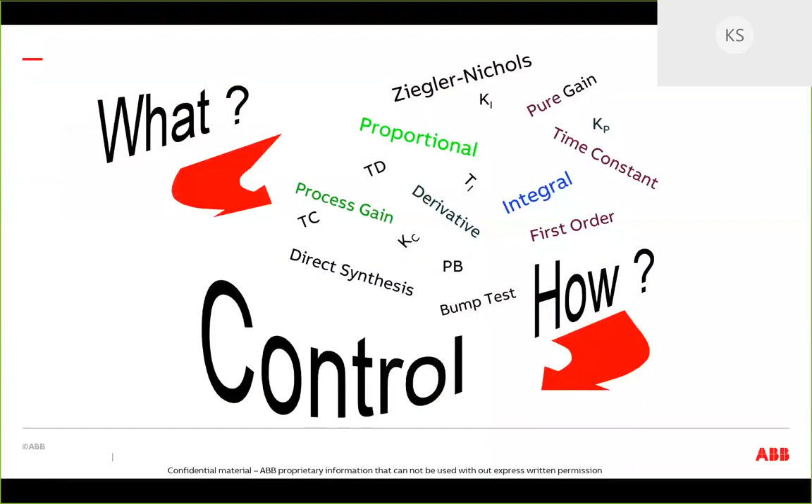Now, the world of process control, and I've been fortunate enough to be in it and have tremendous mentors and training. I can't give you everything in 50 minutes, so what I'm going to try to do is give you the high points, and hopefully it'll spark an interest. I don't want you to leave this thinking that tuning is some magic that only the elite few specialists know. I know it may seem like that, but that's just because we've been doing this for a long time, and we can look at processes and figure things out.

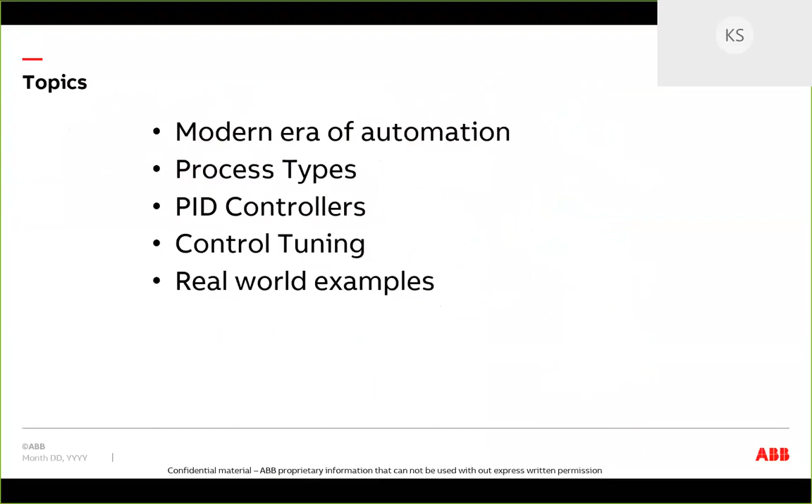That's why I want to show you some elemental truths that I wish I had known that would have accelerated my career, and hopefully that'll help. Then we have a whole bunch of stuff at the end. This is a technical talk, trying to transfer information that ABB is allowing us to do, and all I'm asking is you stay until the end and maybe click a couple buttons on topics you might find interesting. But this is not trying to sell you - I'm trying to show you some fundamental components that allow you to do this kind of cool stuff.

And for whatever reason, this is what I love to do - I love to go into a site and figure out where they're at. We just had a big workshop, and that became one of the biggest issues in the Industrial Revolution we're in: the definition of normal. Where am I, what does good look like, and how do I know when I've left that zone?

There's so much in the information age today that, I mean, that's where I'll have a question here in a minute, but we like to look at that, and since we have the collection - I think I last looked, we've analyzed like 1 million loops a day - we get a baseline based on that, and we can say, oh, you're here. That's what we call a benchmark, and then we can implement corrections to reduce your variability.

And there's value in that, and that's another thing - I want you to start telling us what other technical topics you would like. There's so many, and I have a list at the end, but value: what's the big deal about taking the wiggly line from that big wiggly line to the closer wiggly line, and then what happens if you drop it down or raise it up, depending upon your speed, if you're trying to save materials, do material substitution, speed up, slow down, or whatever.

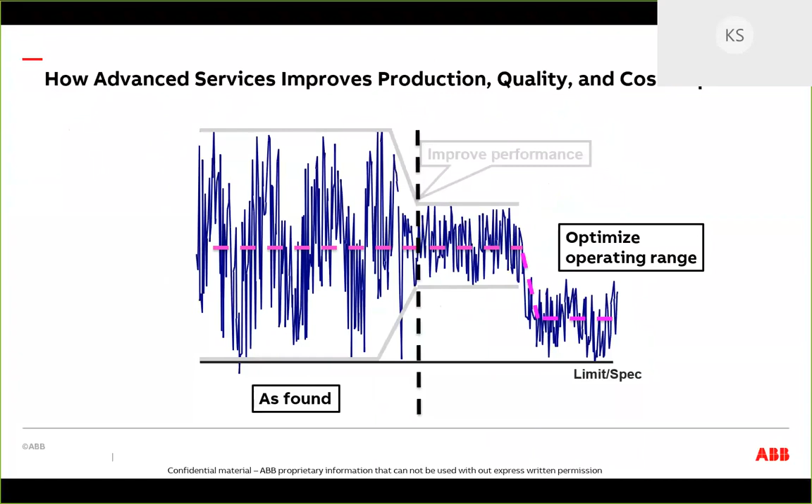So this is the essence of what we do. But what we don't do is make controls that were intended to make things worse. This is a real life picture from a trip to China, where they had an example that said, when we turn your controls on, our control utilization goes up, our production goes down. And they weren't very happy with us. I was like, well, that's not what we designed. Well, that's what happens - and they would show their hand waving like a bell. And I was like, well, that was not what ABB designed.

We don't sit around trying to figure out features that we can sell that don't work or make your process bad. So my point here, one of the truths is: if you have automation equipment that is off, assume it's broken. One of our senior field engineers used to use that as an indicator, saying if it's off, there's something wrong. I've seen this - on a paper mill, if you have a sheet break and you do a wash up and your shifts are all doing stuff to get the machine back, they may have forgotten to put dry stock on.

Then the next shift comes in and thinks, oh, well, that was off, so I'll leave it off. And the third shift comes in and says, oh, well, it's been off for two shifts, I'll probably leave it off. And next thing you know, it never gets turned on again. And so that happens.

And I don't want you to feel bad about that, as in today's world there's so much automation, it's sometimes hard to keep track.

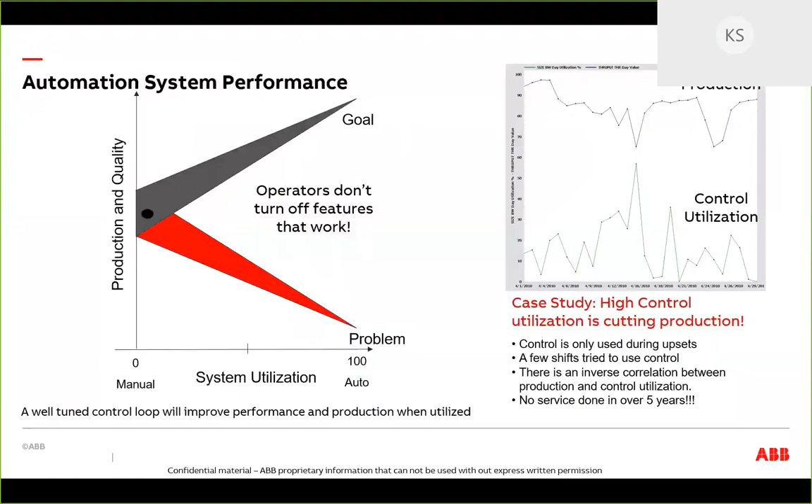Now, what we found, and this is where we're going to have a polling question, Chris will pop up a screen here that you can pick. I'm curious, and I'll show you what our records have found. What would you say is eating your lunch? Or if you were to ask about control loops, do you have problems with your loops being in manual? Are they out of range? Are they increasing variability? Or are they doing a good job? I'm interested, and you can click a button. There's not going to be a test, I'm just interested to see if the research we're doing matches what you guys are seeing.

Chris, what's this? I always forget. This says elapsed time, so when it counts up to a minute, then you can kill it? We've got about 40 seconds left. So this is where it's interactive. I don't want you to think this is just one-sided, but I want you to be participative, and this is a way you can do that. Also, maybe so you don't fall asleep or whatever.

I also want to mention a safety moment while we're going into this. Guys, if you're driving, pull over. There's nothing here that's that important that you can't watch later. I don't know where you're at if you're in a facility, so I can't tell you if an alarm goes off. In my house, there's not one scheduled. But please look at your exits, look where you're at, and make sure you're aware specifically. And then in today's world of this virus, I hope you're all taken care of.

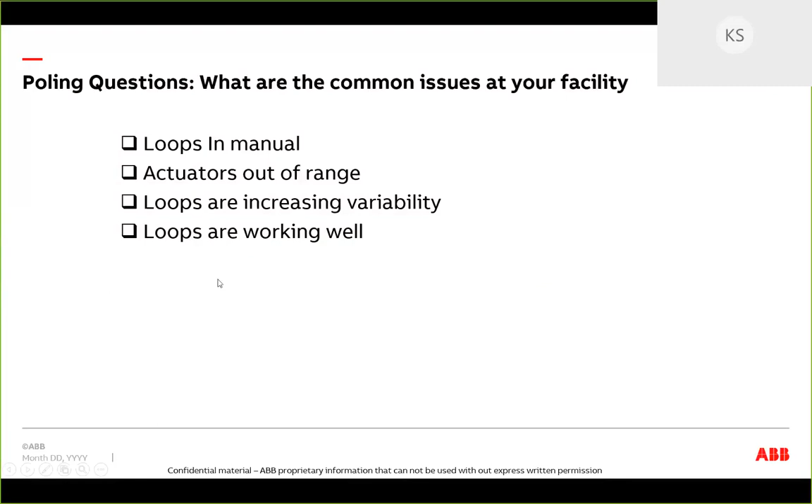Let me show you the next one. Can I close your window there? Okay, and then I'll go to the next slide.

This is what we kind of have seen. You know what the half-life of a control loop is? PID loops are everywhere, there's thousands of them. When I first started, if I could do 10 loops I thought, oh this is wonderful, if I could do that in a week. Now I think the last one our group did, we did 1,500 at one time. And we're finding that about 50% of your loops are going to need recalibrated within 6 months.

And recalibrate could be a bunch of things. If we had a setting I'd have you think about what can cause a loop to go bad, it's not just tuning. When people say it's just a tuning issue, I kind of want to say you don't really know this stuff. It could be an actuator, it could be a valve, it could be air, it could be dirty air, it could be the valve position, it could be the raw materials, it could be the temperature outside. And then sure, it could be the tuning, but it could be the operator range that thing runs in. It could have to do with machines running parallel at one time, and individual, so you move in and out.

And what we're seeing more and more is this tendency for loops being in manual, which is what you're seeing. So keep that in mind: we didn't design all this stuff to have it turned off, so why is it off? We need to talk about that.

I'm actually seeing more loops being out of range. When we first did this, it was around 15, now it's closer to 20 to 25, which is because most of us have been trying to drive production, and that means getting your actuator constraints out, so they get into the nonlinear range. And as your actuators get out of the control range, your variability goes up, which means your quality goes down.

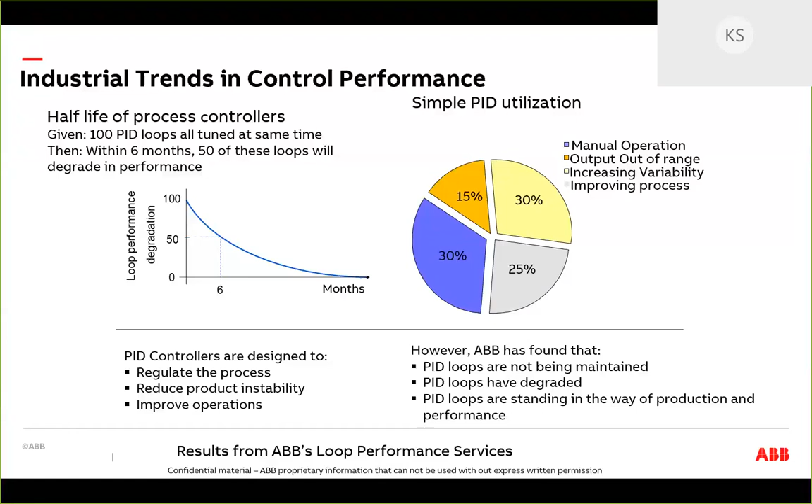Now, I'll finish this on that kind of a talk. We're all about actual production quality or cost to produce. And I'll try not to give all my war stories or we'll never get done, but I've seen this stuff manifest itself in this chain of process, actuators, transmitters, filters.

I saw a guy plug in a filter and it made a head box go unstable, or a tank level. They put a filter to smooth it out, but the filter changed the dynamics and drove it into instability, and I get called in the middle of the night. I've seen all of these, and our team has seen all of these. So it does take a little bit of understanding to know the swim lanes.

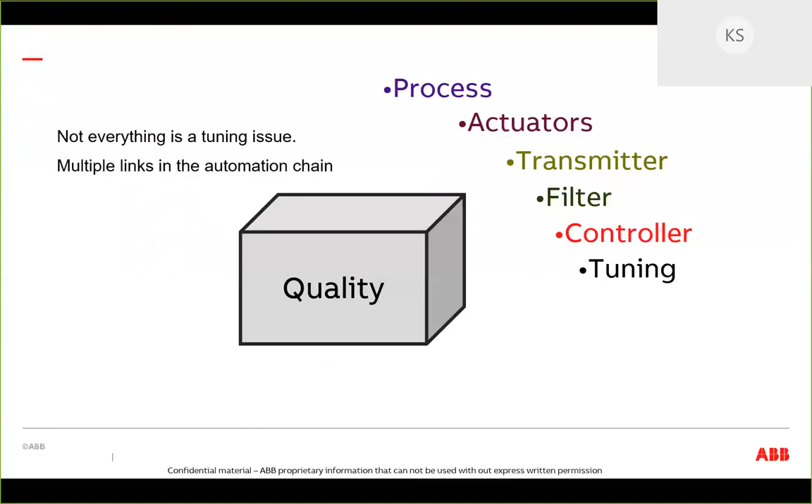This little bit of discussion for the next 40 minutes is to kind of go through those. Okay, process identification. That's the starting point, to me. There's other starting points, but I need to know the dynamics.

If I hop in a car, I kind of want to know if I step on the accelerator, is it going to take off? Am I driving a semi-truck, or am I driving a Porsche, or a Volkswagen? You kind of need to know so you can adapt. All of our processes have dynamics, and I like to call those dynamics unknowns or question marks.

There are different methods for identifying those question marks. There's Newton's laws of physics, called first principles. I don't know if you've ever done that kind of stuff - that's not very fun, but you can do it. I do like the one where you use a mass balance or an energy balance. Actually, if you watch the tank video, you can actually tune a tank based upon the volumetric calculations without doing a bump test.

It's pretty cool, that's kind of an example, but sometimes the best way is to inject energy of some sort into this. There's a whole other side - it could be a pseudo-random binary sequence, it could be a sine wave, a step wave, a square wave, an impulse. Kevin likes to bump it. And when I say bump or a test, I'm just talking about a step change.

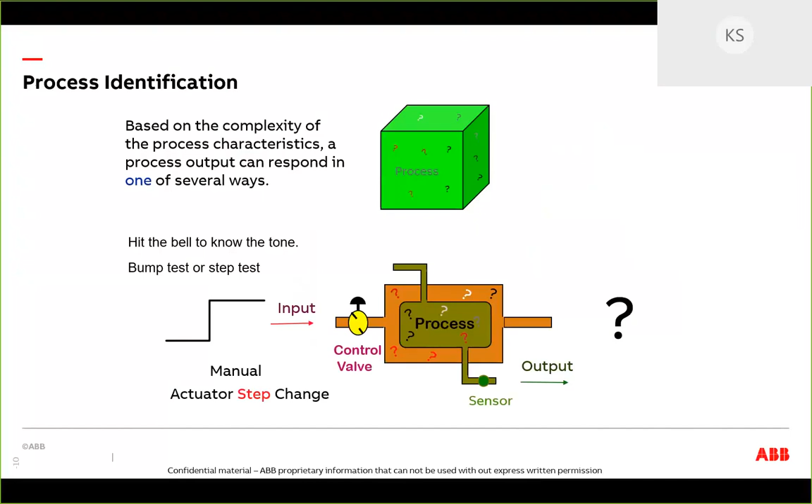There are things you need to be aware of - you just don't go and bump everything. You want to make sure you bump in the right direction, I'll give you a hint about that. And that can be open or closed loop. But the point is every process, they're so common that there's at least six classifications - there's way more than that, but 6 classifications I want to bring your attention to that you will likely see.

The pure gain process really doesn't exist. I guess a light switch would be close to that - it's off, then it's on. If you slow the sampling rate down enough, you can cause any process to go into that.

Now, a first order process is a time constant, a lag, which is like your flows, your pressures. That's the one we're going to focus on today. And I will talk about some of the higher order overdamped and underdamped solutions. Then integrating processes are like tanks. And then process with dead time, that's another one.

All right, Chris, you may have to let me know if I'm still talking periodically.

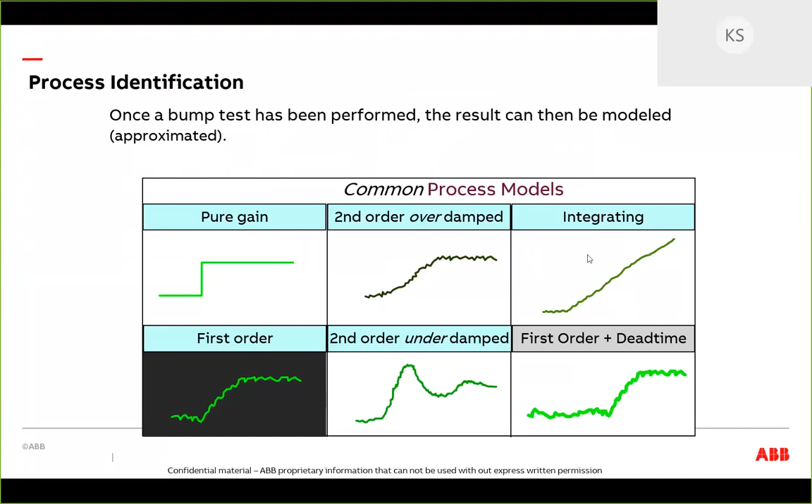There's a network issue flopping around on my side, so I hope I'm still talking. Yeah, we can hear you fine. Okay, well, I got this thing that says your proxy server needs it. I'm like, well, let's keep going, and hopefully I can get through this.

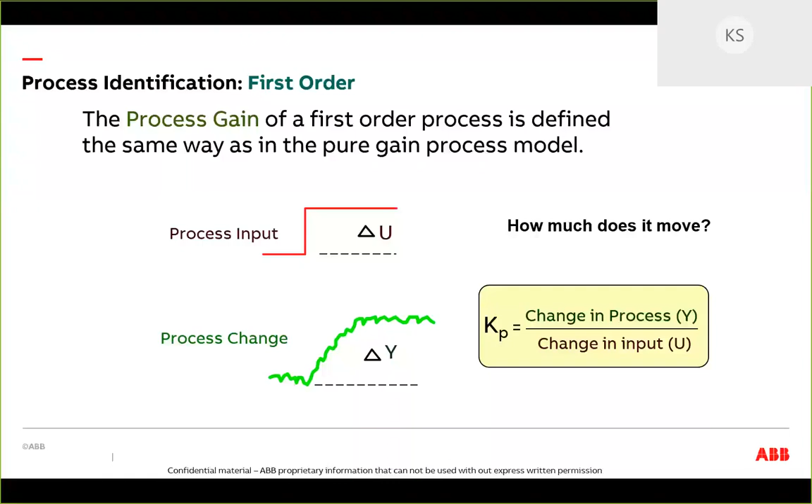Okay, so identification, there's a couple of ways to do it. There's closed loop, where you change the set point, and open loop, where you change the actuator. What you're trying to do is figure out how much mass does this input inject into the process. It's sort of like a garden hose versus a fire hydrant—how much oomph does a quarter turn give me? You've got to know that, because if you don't, your controller is going to have a bad day. So that's a way to calculate the change in measured value, that delta, divided by the change in the actuator that caused it. That's a great way to identify the magnitude or strength of your actuation effort.

The other one is how long does it take for that response to settle out—how long does it take to go from when I made the change until it settles out? Now, the purists on the phone will realize that it's an exponential, so it's 4, 5, or 6 time constants. I have found that I divide by 4 better than I divide by 5, and when there's noise, my eye can't really tell the difference between 4 and 5 time constants. And if I'm going to build stability into my calculations, dividing by 4 gives me a bigger number, and that's why I pick 4.

There are other methods, there's a 2/3 method you can do, and I have those in those videos. But you have to know where this thing's going to settle out. This is where knowing the type of dynamics matters—if it's a tank, it'll keep going and going and going, and you need to be careful, because you put an imbalance into the dynamics and it keeps integrating that. So I don't just do a bump test and walk away. I look and watch and make sure that this thing settles out, and if it takes off fast and comes back, I know I've got issues.

When possible, I like to go and evaluate the process by hand—look at the actuator, look at the valve, make sure the instrumentation is right. In today's environment, that may not be so easy to do, but by looking, if you bump the actuator and it doesn't move, don't tune it—go fix it. It's like if you're driving your car and you turn the steering wheel and the car doesn't turn, you don't speed up. So if you can't come up with a correlation between the actuation input and the process measurement, you need to go back and figure it out.

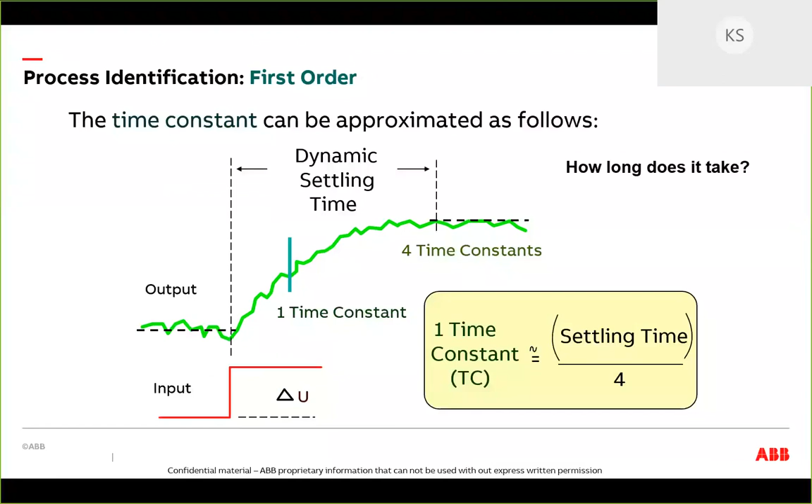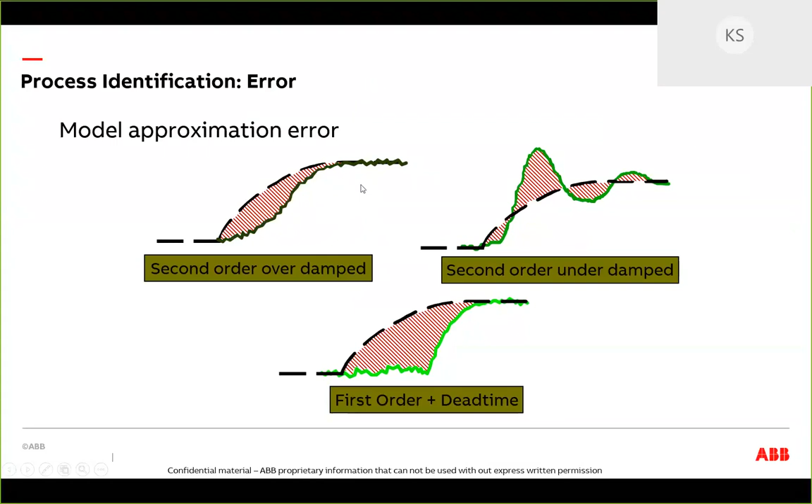So those are the hints that I'm going to give you. In all of these, I know how much it moved this way, how much it moved, and how long it took to get there. Now, another little hint—when you first start doing bump tests, it's a little daunting.

I've seen folks, myself included, keep bumping in the same direction. Next thing you know, you're making an off-spec product. I like to try not to bump too far away from where they're running their production process.

Unless you're looking for hysteresis or backlash in the valve, if the operator says you can do a 2% bump, this allows you to go up 2, down 4, and back 2. And that middle one gives you the best signal to noise ratio.

This is kind of an art, and a lot of times I'll look at the trends and see what normal actuator changes are. I like to put the loop in manual, see if it settles out. I like to do manual changes that are small until I can start seeing and predicting the results.

I very rarely will do one bump. I like to do 3 to 5 until I start to be able to predict. That's kind of how I do this. That's when you're doing them one at a time, and that's what we teach.

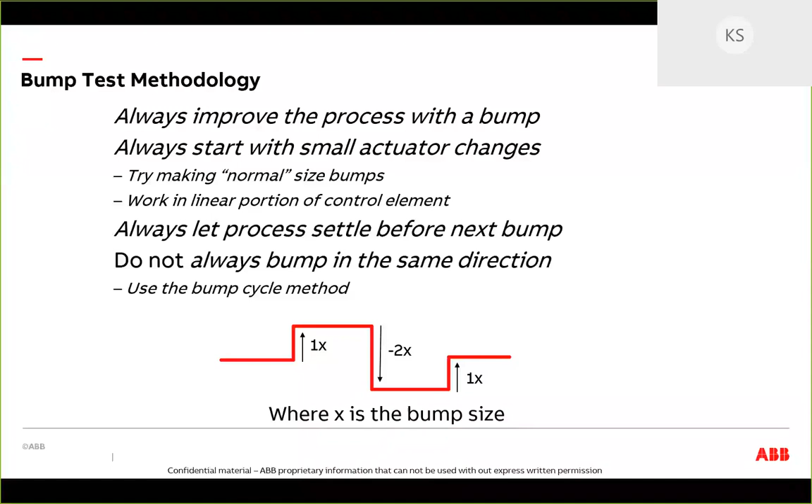In today's world where you have a thousand of these loops, you need to pre-qualify which ones you go after, and I'll share that at the end. Now, I talked about that.

Do you have to be an expert in Laplace transforms? No. You need to know that the process gain and the time constant make up a majority of the self-regulating loops - how much did it move and how long did it take to get there. Once I know that, I can move on.

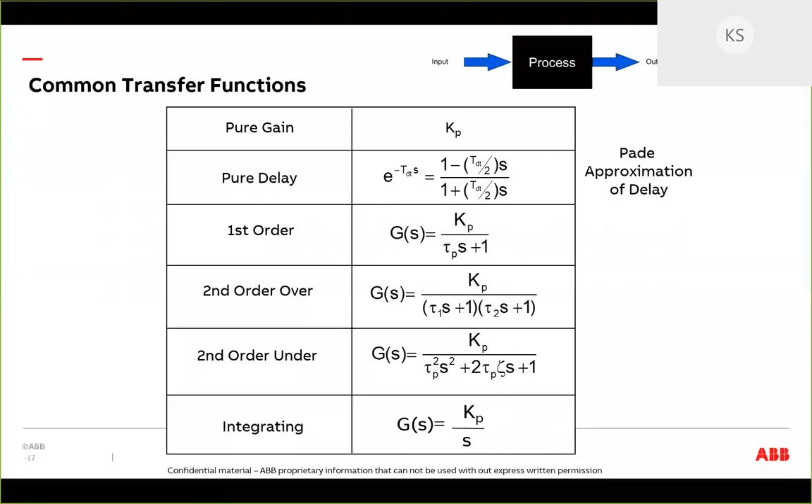So I just showed you there's some mathematical background here, and you can keep going into this. This is what, when I got my undergraduate degree, I liked so much that I went back to Ohio State and got my master's in this stuff. So be careful what you're listening to - it could affect you for the next 25 years.

This is where, if you ever have an interview with me, I'll draw this out and it really freaks people out. They'll say, oh, they changed the machine speed. I was like, no, it's just dots on a screen. What do you see? Is the measured value changed? Okay, there's a change. Well, it's staying off the set point.

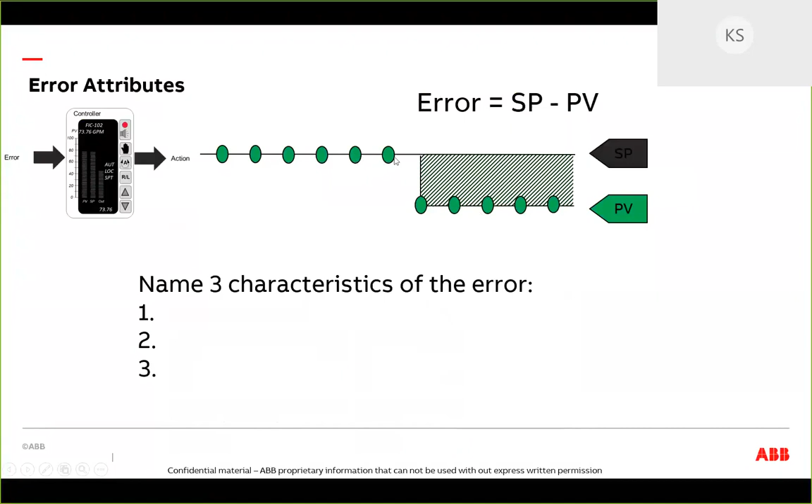Okay, there's a duration. And then the last one's kind of hard. If you look at the difference between these two dots and these two dots, that difference is the same. Where is it that the difference jumps out? It's this one, between here and here. So when you put it together, you have the rate of change, the duration, and the magnitude.

The reason I'm showing you this is this was the epiphany, the aha moment. It's like, oh, that's what a PID control does. And that's what allowed me to start looking at the outputs of controllers and identifying the tuning. It helps you immensely.

This did for me, whether you just take it or not - there's 3 attributes. The present error is called the magnitude of the error. The duration of the error deals with the past, sort of like a watchdog, and the rate of change is looking at the future error.

And if you look at the mathematical equations that go with that, proportional is a change that is proportional to the error. The integral is integral to the duration of the error, and the derivative is this pulse that changes. For some reason, this picture was the aha moment for me. I was like, oh, this explains standard, parallel, classical.

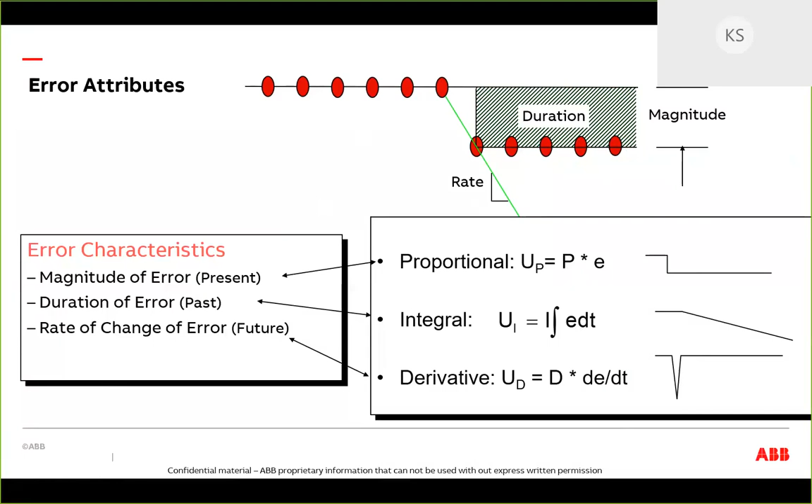I always thought that P kind of did its thing, and I just didn't understand it, but this picture helped me realize how this stuff was built. If you ever get a chance, do research on the original full scope pneumatic chart recorders that had bellows and nozzles and baffles - they're works of art, and they were designed this way. That's what I thought was fascinating. So I'll go on now.

It's kind of important to start to think about the interactions between the components P, I, and D.

The first aha moment was the three attributes of error. The next aha moment was, what's a repeat time? I used to get that. What's a reset time? What are you resetting anyways? Because that's the integral time, and it could be in repeats. So how is time a repeat? And then proportional could be a proportional band, it could be controller gain, there's a bunch of different terms. And if you have the Infinity, it could be S6, S7, S8, or S5, 6, and 7, whichever, or S11, or other S numbers or letters.

I had one guy get so shook up: why don't we have standards on tuning parameters? I'm like, because there's different companies, and we all design different stuff. But you have to step back and realize the theory of operation is the same.

That's what I've done here: the repeat time, the way I like to think in a standard controller, is the amount of time it takes for the proportional kick to be repeated by the integral action. So you can see your original error as a step change, your P kick happens, then you integrate that, and the reset time is how long it takes to reset that original proportional kick. That was another aha moment, maybe you had more, but that was an aha moment for me.

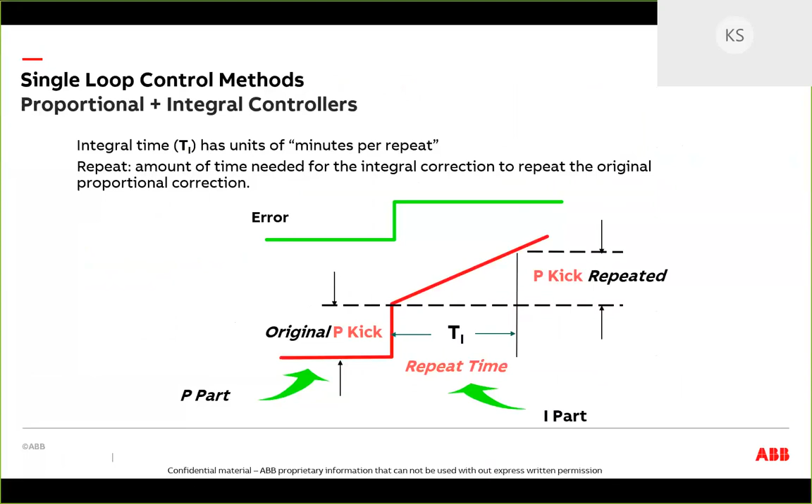When we do the training class, we actually do labs where you can experience this. You can set it up, and I've done this, like if I go up to a controller and I'm asked to tune it and I don't know what it is, I'll ask them to bench test it, or I'll set up a Gen Con or something like that, make a little controller, induce these changes, and watch. I'll adjust the PI and watch the output, and then I can tell the algorithm type, and then I know how to tune it. So you can bench test stuff, and it's easier now that you can do it in software.

On the left-hand side, I'm showing constant proportional with different integrals, that kind of makes sense. I've got it set up so you can see how long it takes to repeat that proportional kick - it's less. Over here, I have constant integral with different proportional. See how the slope changes? This is called the standard algorithm. The parallel controller doesn't do this, and I'll explain that in just a minute. That's one of those other light bulbs that went off.

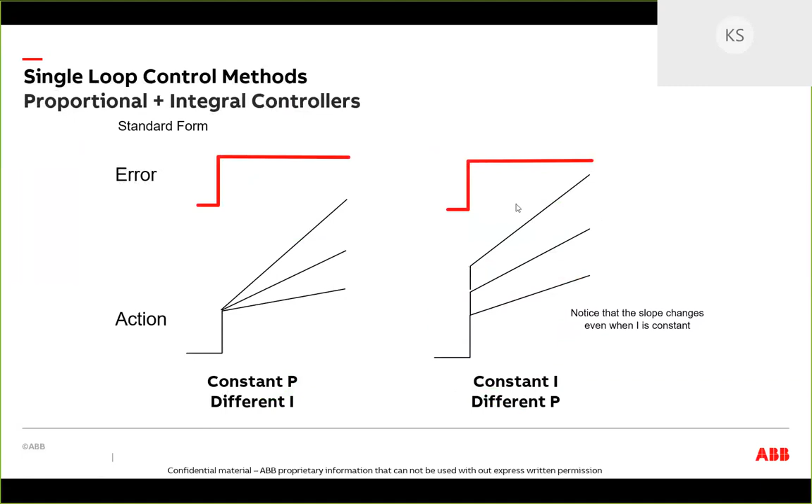Derivative is really another interesting one. It's looking at the slope of your error, and the derivative time is a forecast into the future. You're saying, okay, based on this slope, I expect my error to be this in the future. Well, if I know my error is that in the future, I better start correcting for that error now. And that's the whole thing.

But this also illustrates the problem with derivative. If you go back to the history of derivative, it was designed in the pneumatic era - go back and look at the full scope, the early chart recorders that are beautiful works of art. Pneumatic, air, sluggish stuff, and there wasn't noise. It just was slow, so you could kind of goose the output with derivative, and that's what it was for. Today, you have so much noise.

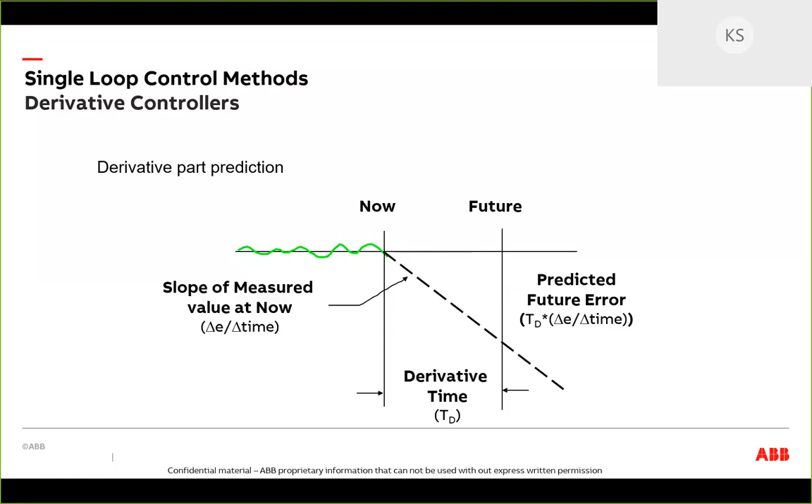This is one area that I've seen cause a lot of consternation in the industry: the forms of the PID algorithm. This is where I wish I could talk with you in person to see if you've even seen this. It used to be very clear by vendor. If you had an ABB Master, it was standard. If you had a Bailey Infinity, it was parallel. If you had a Mod 300, it was classical.

But then what happened is when people started mixing and matching control systems, they would toggle between modes in the setup of the controller. I was at a site that had a list of controllers where the default was parallel, but somebody didn't realize that one of these parameters toggled the algorithm between parallel and standard. So half the controllers defaulted to standard, half were parallel. That poor team was like, this tuning stuff is nuts - if I put this number in on these, it works, the same number on this, it explodes. So they were very disenchanted with process control, and I was like, oh, you guys.

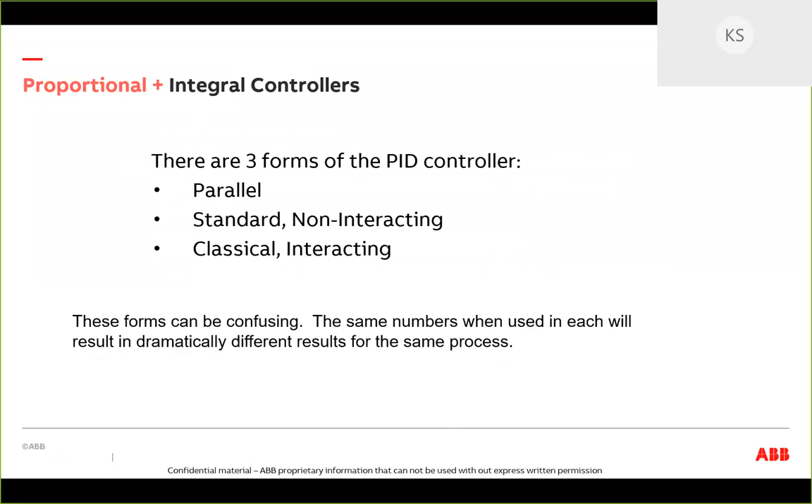So what I want to do here is just show you that. In the book, chapter 6 has a bunch of these. A lot of times if you go to the manufacturer and look, you can see one of these pictures.

So you'll see something that looks like this. Parallel controllers are literally parallel - here's your error, and the error has parallel paths to an output. This is kind of the original, how folks made them. You'll see either a block diagram like this or an equation, and what I look for is the parentheses. If there's no parentheses around this, you can guess it's parallel. That has a big deal to do with tuning. In this case, the proportional gain is just on the error, the integral gain is just on the integral, and the derivative is just here.

Now on Infi 90, they'll put a parenthesis around the whole thing, and then they have a scaling factor. The scaling factor is used to normalize or convert the measurement into percent. That's the other thing - when I dump tuning parameters, I'll look at that. I'll take the span, take 100 divided by the span, and that's what that calibration factor is supposed to be. 60-70% of the time, it's not, and people will use that and detune their controller.

That's another red flag - so there's two for you. You can go look at your derivative, dump all your tuning parameters, look at derivative, and then look at your scaling factors. If they're off, that goes to the head of the class as loops to play with. This is parallel.

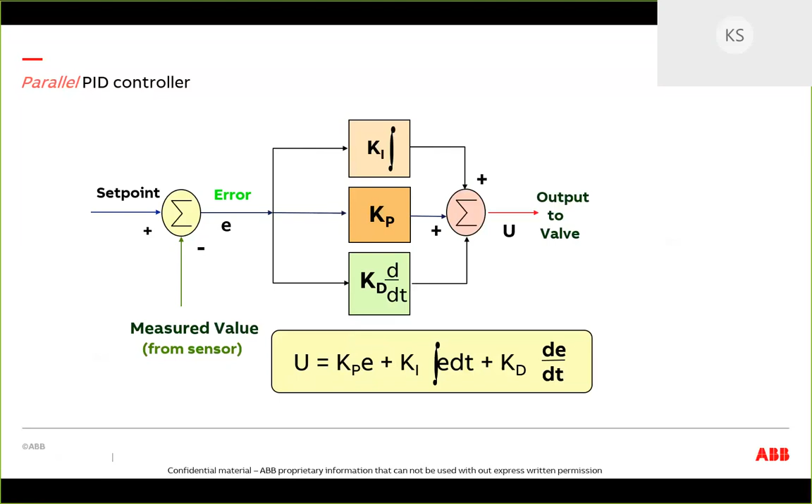The reason we tend to like this is you set the integral based upon the dynamics of the process, and then you adjust the speed of response by adjusting the control gain. Derivative is used for something else, but for the most part, if derivative is 0, you just have this top part. You can see the difference - in parallel, they're parallel paths. So you can make a parallel and standard act the same, but you have to change two numbers.

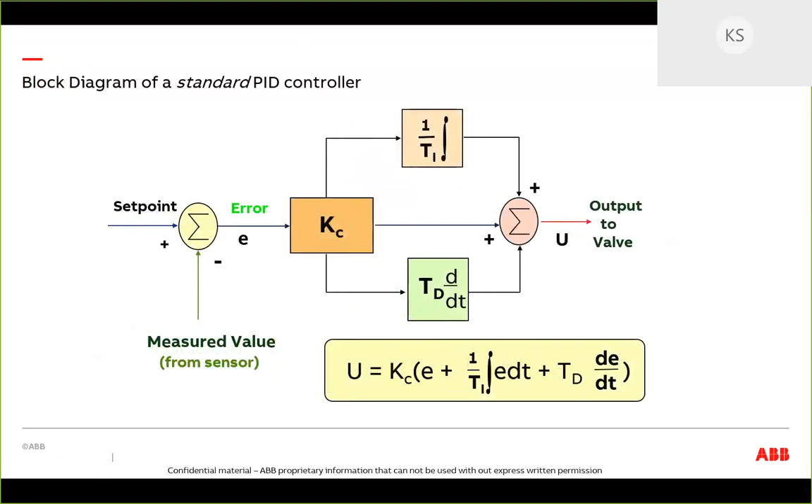I don't know if this is making sense to everybody, but please check - it's not enough to just look at the manufacturer. There's usually a function setting within the PID block that allows you to pick which form of the PID you want to use. And as wonderful as that is, it can be very confusing if you don't change or check that.

But if derivative is 0, this term goes away, and you are left with the same as a standard. So if derivative is not used, standard and classical are the same, and so you may only have two different loops.

But this has been a challenge in the industry, especially now that there's a hodgepodge of control systems out there, and a lot of this stuff's been installed for 30, 40 years. There's single loop controllers where you may have lost the documentation. There's DCS controllers that may have features where the default is standard, but they may have flipped it to parallel, and it can come across as extremely confusing to folks. So hopefully you can use this to clear it up a little bit.

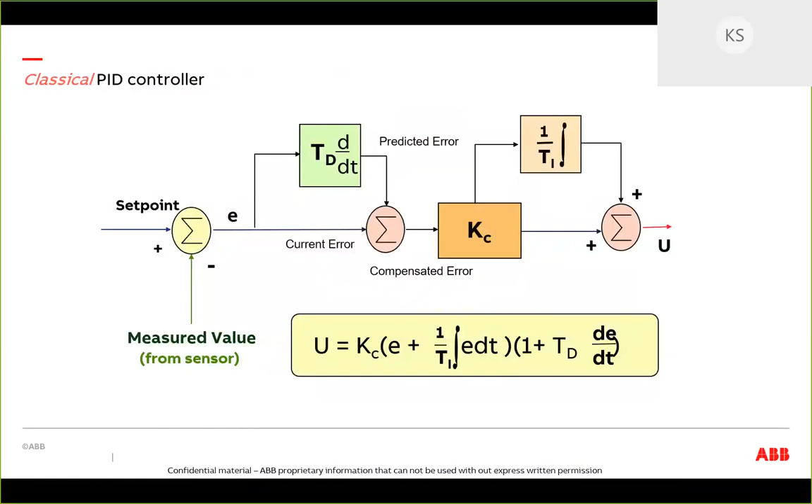That's what I'm trying to show here - the big difference between standard and parallel. On standard, once you set your integral, it self-changes based upon what your proportional is - it's just the slope. On parallel, the slope doesn't change. So what happens, and that's what gets folks confused, is you have an effective integral time that gets slower as you increase your proportional gain, which is counterintuitive. It's like you increase your proportional and the reaction to get to set point is slower. Well, that's because of the way the algorithms are written.

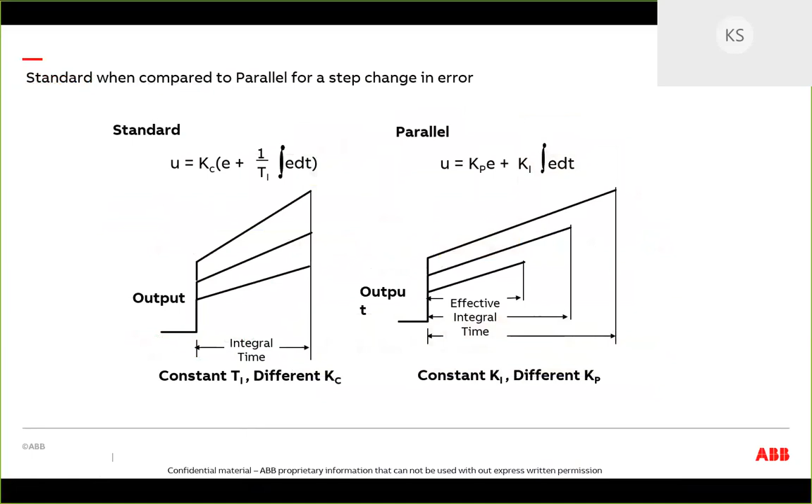So, man, I'm going to have to speed up. I'm kind of passionate about that. I've seen that hurt so many folks.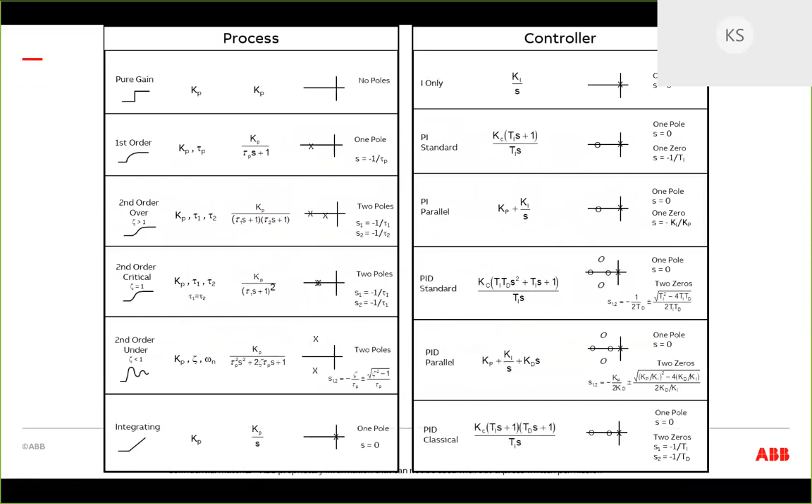Now, what's beautiful about process control, at least I think, is you get to decide. You get to come up with a tuning algorithm that takes a set point change and makes one of the items on the right. There are different algorithms, and that's why I want to get you to tune back in here - what technique is most common in your facility for tuning loops? So could you put this one up there? Is it Ziegler-Nichols, the quarter wave decay, Lambda tuning, non-minimum variance, direct synthesis or pole placement, tune by feel, guess and check, or well, the defaults are good enough?

I'm just going to leave those in there. I'm curious, again, what it is. I have a bias, and I've used a lot of these, but what is it out there in your industry? Kind of interested to hear. I know what schools teach - I get to talk to colleges pretty regularly and present this stuff. So curious to what you have to say.

Still have a few more coming in here. All right.

Interesting stories - Ziegler-Nichols worked for Taylor Instruments, which is part of ABB. I got to go to the plant in Rochester to teach a class, and it was actually the facility probably on the slide. They knew I was there teaching and said I might be interested in this back room. Well, it was the original classroom lab that these two guys worked in. I got to walk into this literal museum, and all the stuff was old, but all the original things were right there. I was playing with the full scopes and the pneumatics, and it's pretty neat.

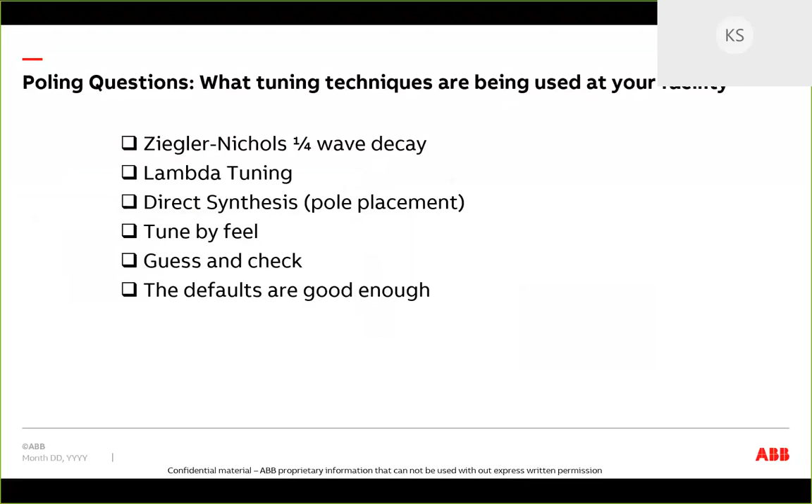In the world we live in now, where you're entering numbers, you can't really feel the number. So there are different techniques, and I'm going to show you one I like because I use it all the time. It's called direct synthesis, or Lambda tuning - may have come from wavelength tuning. You may call this too slow, but I'm looking for the long run.

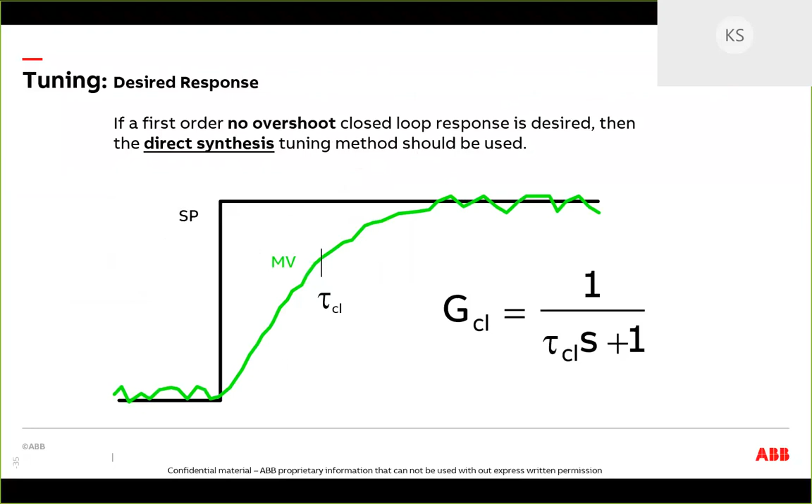If you want a 10% overshoot, we can help you with that. But I like to say, when I change the set point, I want it to come up nice and smooth into the set point, without oscillating. I just want it to be robust, and I don't want to get called in the middle of the night because this thing puked itself. So I want to set it up to do this - so how do I do that?

The math - that's what I was showing you, and you might want to play with this. This is the closed loop transfer function. You plug in the dynamics of your process and the dynamics of your controller, and you can solve for your closed loop dynamic, what you want. This GCL is what you want - I'm showing it as 1 over tau CL S plus 1. Your process is KP over tau PS plus 1. When you run the equation, it spits out a controller that has the exact form of a PI algorithm. It's not magic - that's why it works.

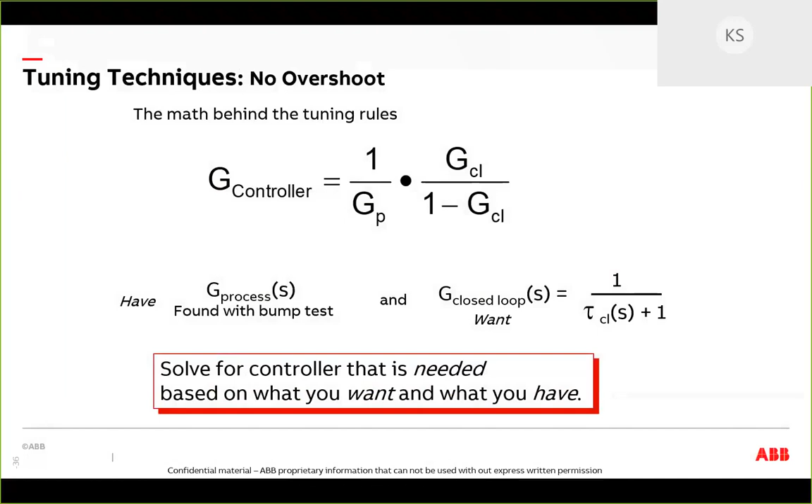So these are the equations, you can write this down. The controller gain is 1 over KP times the tau ratio. The integral time is equal to the process time constant, and there's no need for a derivative term.

Now, in the last lecture, someone brought up that the process gain needs to be normalized, and that's a little bit tricky. Most of today's controllers operate in percent, so there's a scale factor there - it's not in gallons per minute, liters per minute, inches, or whatever, it's in percent. So that means you have a scale factor. On the 800xA that's built in. On some systems it's a separate variable, like the Infi 90. So don't freak out about that, but you usually have a scale factor. I'm assuming everything's in percent here, so that's why it's simplified.

The other thing to keep in mind is your integral time. However you calculate your time constant, whether it's in seconds or minutes, make sure your integral time has the same units. The Mod 300s were kind of slower and worked on slower processes, so their integral time was in minutes, sometimes hours. The 800xA and Infi 90 were faster, so they were in seconds, and actually Bailey could be either one. I had one guy come flying into a class saying I caused him all this issue - he was off by a factor of 60 because he forgot he was in minutes but entered seconds. He wanted 1 minute and entered 60, so that was pretty juicy.

Anyway, those are things you kind of learn, and you find out pretty quick when you do it wrong. But I want you to hear this too - you're going to make a mistake. If you haven't done this before, start on a conservative loop that nobody really cares about, and sharpen your teeth there. If you need coaching or help, don't start on the most critical system - like, I don't know, helping with cooling rods on a nuclear facility. Maybe start on a less critical area and work through these things. But the thing you have to hold onto is that the theory doesn't fail.

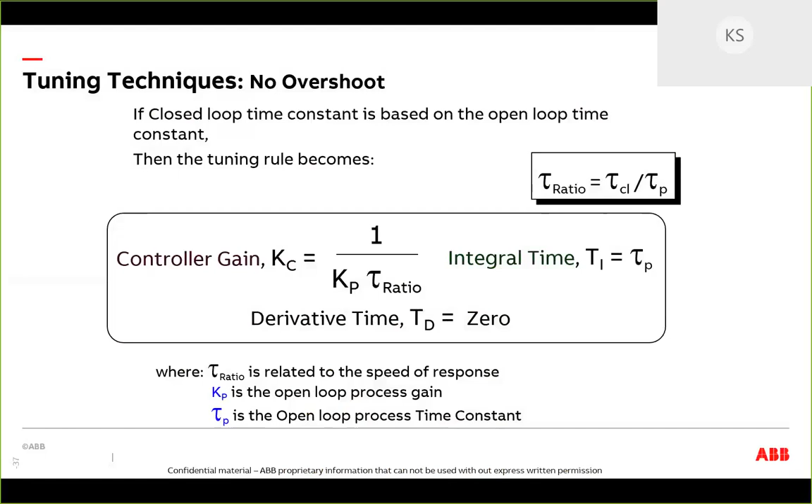But in this arena, you can pick the speed of the response. So I mentioned this thing called tau ratio. It's simply a Kevinism for closed loop to open loop ratio. So if I have a 2, that means I want the closed loop response to be 2 times longer than the open loop response. If it's a 3, 3 times.

You can actually have a half. Like if you get in your car on a cold day, you turn the heat up really fast, and then you throttle back to speed up the response. That's a leading action.

So that's what I like about tau ratio tuning is you've actually calibrated your stuff so that you can adjust the tuning with a knob, which is 1 for pretty aggressive, 4 for pretty conservative. Or if you just don't know your process model, you put in a 4. If you know it, you go with 1. Or if it's like a steam loop or something, you might be able to get a 0.7 in there.

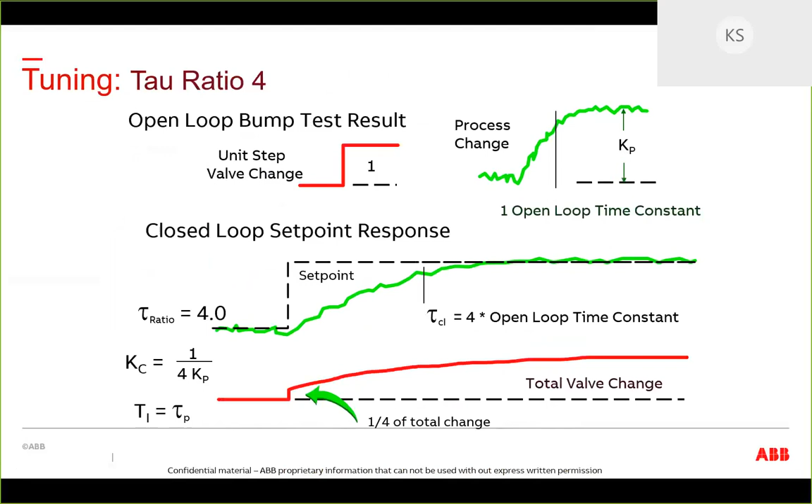And so this is showing what it looks like a 4. If you have any of me or the guys come in and do your stuff, I'll usually have a napkin or a piece of paper, and I'll draw this out. Because I like to know that if a standard equation, the integral stays the same, and then I adjust the speed with the control. Now today, everybody has tuning packages and auto tuners, and those are great, but they don't replace this stuff.

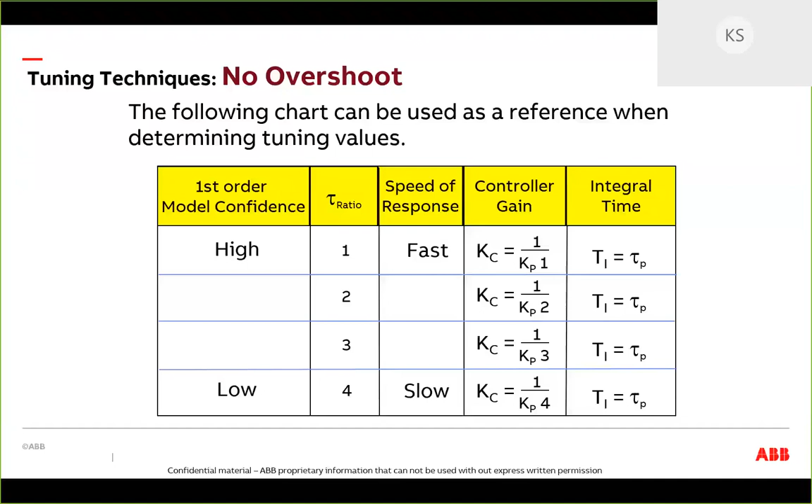If you don't kind of know what the calculations should be, you don't have any idea if it was wrong. And so there's a validation step.

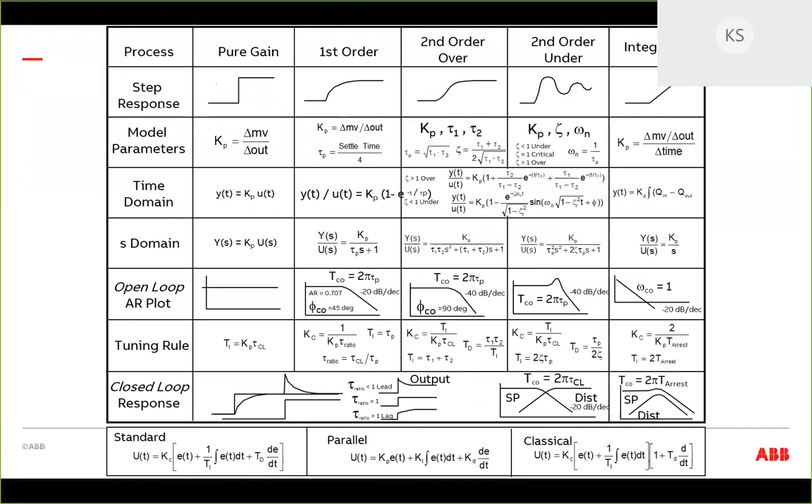Maybe we do a talk on frequency analysis, looking at Bode plots and finding the cutoff period and the dBs per decade and what your controllable energy is. If you have a process that has cyclic parts, you need to know that. And then the standard parallel. So this one page, and we can make this presentation available for you guys if you want it.

And actually, before this, I got to work on pneumatic controllers. And believe it or not, I got a grievance filed on me for tuning a pneumatic controller with a screwdriver because they thought I was doing something out of my swim lane. This was 30 years ago. It was an air snubber, a filter that needed tweaked, and I pulled a screwdriver, and I had a grievance filed because I was tuning a loop with a screwdriver.

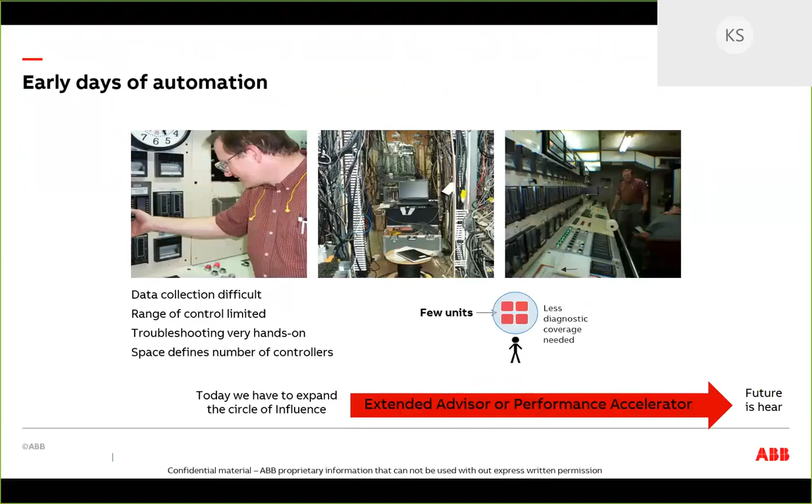And we turned this place around with the principles that I showed you here. Today, I'll just show you in the bottom, we have moved into a future that allows us to automate and build on everything we've done. And it starts with these KPIs.

And I know there's a lot of folks out there that have an automated system for control loop performance, and that's wonderful. But don't, and so does ABB, but don't get so in love with that you forget that those numbers have to make your production quality or cost to produce better.

That's my point. I'm seeing that more and more as we get in love with there's so much that we're dealing with. In Industrial Revolution 4.0, there's so many things with safety, cyber—it's not just loops anymore. In that picture I showed you, you didn't have networking, you didn't have to worry about hard drive space. Now we have to worry about all that. So the hours in a day for you to do all this, you just don't have it.

So we can help with that, and that requires you to know where some KPIs, or key performance indicators, are. When I started, I had 10 loops—it was not a big deal. Today, there could be 1,500. I can't do all that I just showed you on independent loops. I need to pre-qualify those.

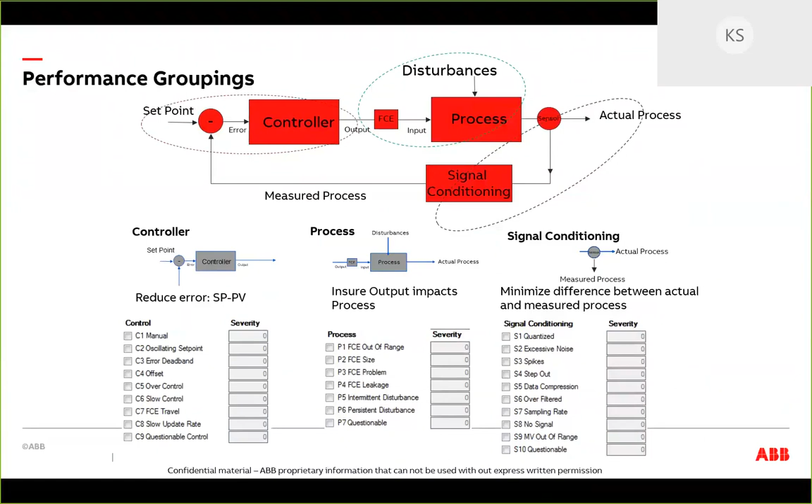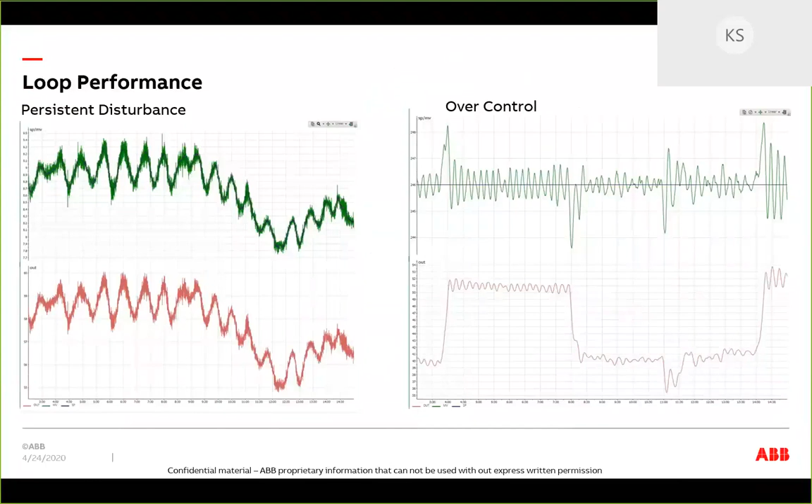So then we start having—what do you see? This is where I've seen us go backwards a little bit as an industry: we don't realize that multiple things can fire a loop. If I walk in and look at the middle section, I may say that loop's fine, and then I walk out and it goes bananas. Then I come back in—so you need to look at the trends and the persistence and realize there are multiple things that can impact a loop.

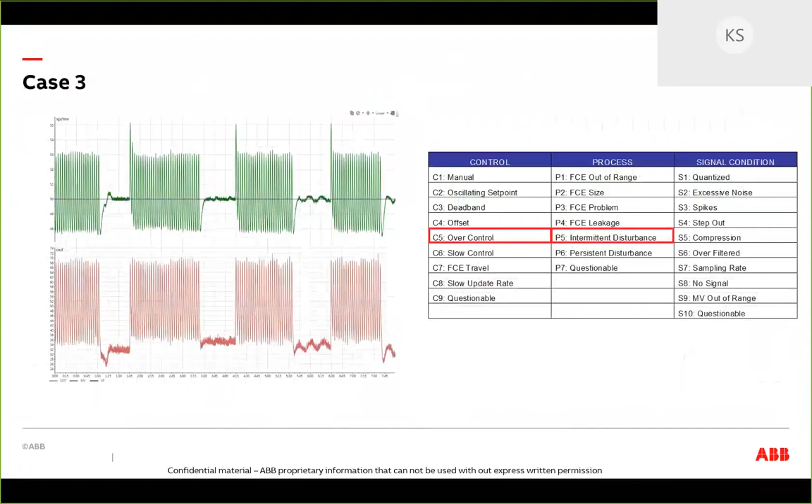What I'm trying to say is there are multiple things to loop tuning. What I showed you was input-output relationships, and that's very important because you know what it's supposed to do. If it does something different, it's one of these things that's screwing the pooch—one of these things sliding you off the mark. Then you can set up a corrective action for that.

These are the most common ones, but we still have questionable calls because there's still stuff we've never seen. I looked at this just yesterday, going through data for a client, and I'm like, I've never seen that before—and I've been doing this for 30 years. So there's still stuff happening. I'm like, well, that's fun, let's go find it. When you know what good is supposed to look like, then it becomes, oh, that's not good.

Now, if I quiz you, what would a tank look like if you did this with a tank? It'd be a triangle wave on the top and a triangle wave on the bottom. That's the kind of fun stuff that you learn.

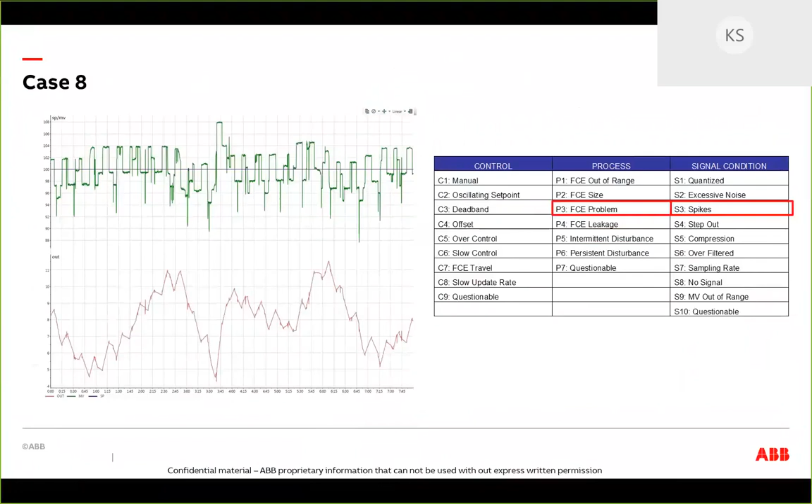They had no control logic. They hadn't tuned it, never configured it. It was a DCS, and they just took the old stuff and put in the new stuff. They didn't understand Cascade, and had never configured it. I said, let's throw some PID cons and GEN cons in here and wire this thing up.

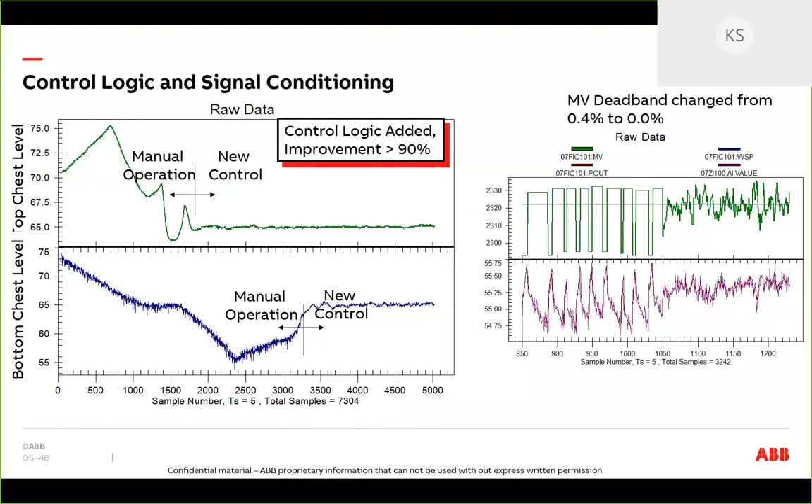So this one was the measurement. That's the way it's always been, and I'm like, that's not right, that's not what good looks like. This wasn't the tuning, it was a setup parameter. Once we changed that, it completely changed the nature of that machine.

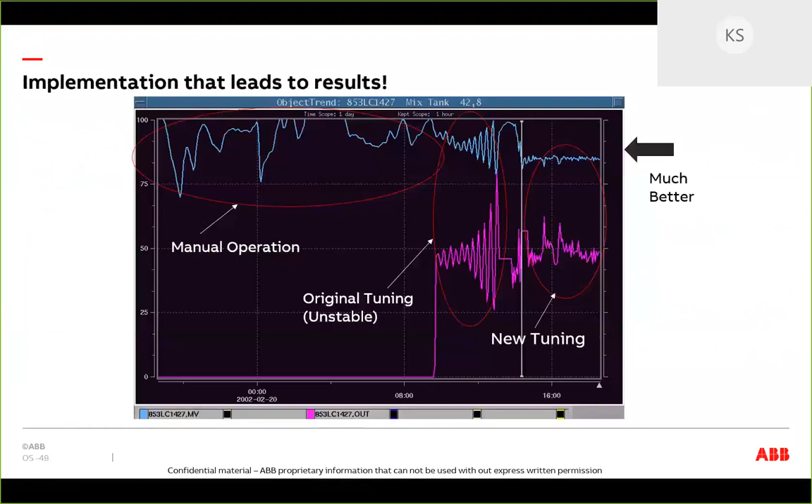We did all this tuning stuff and turned it on, and this saved the customer $1 million a month. So what I want you to see is tuning, there's a lot of positive and a lot of potential, and it's not magic. I'm just showing you the very, very tip of the iceberg here, but I hope it's enough to get you excited that, wow, maybe this opens up a world of opportunity.